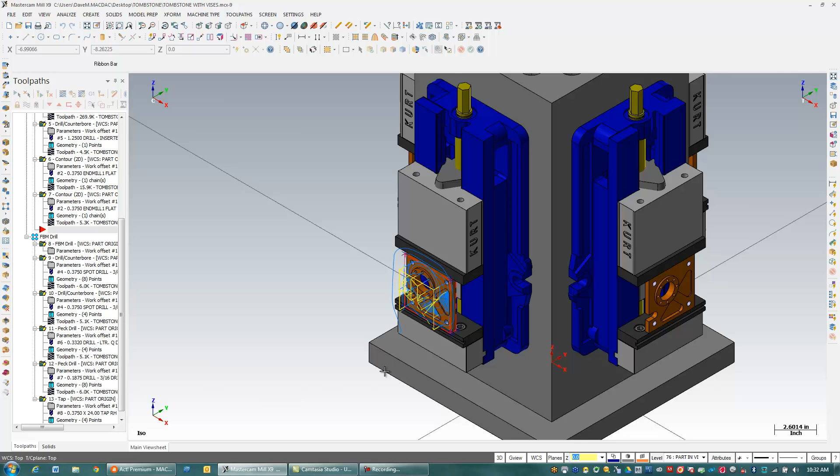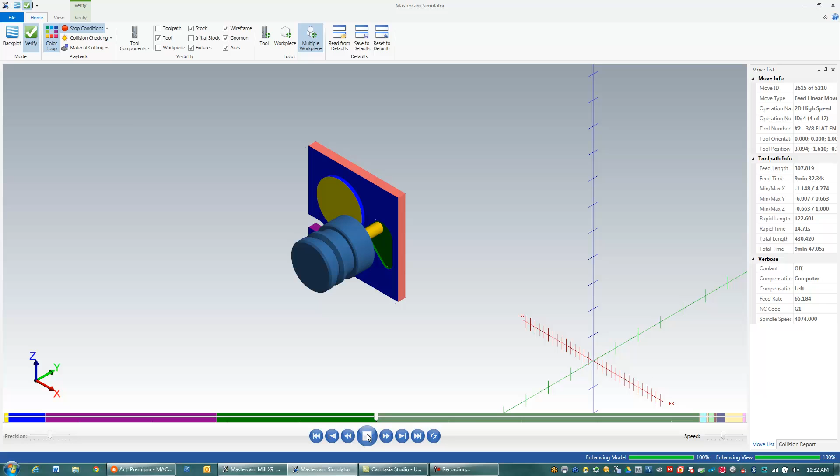I've been programming this part here on a tombstone and things are looking pretty good, and I'm going to go to verify it right now. And when I go to verify it, at least by default, I don't see any fixturing. Now in Mastercam X9 I can bring fixtures into my verify to help me check for collisions or crashes or anything like that. So it's a good idea to do that if you have the fixture already drawn up and that's something you might be worried about.

Now, in order to do that, I need to have my fixture all on one Mastercam level. So right here, this is a part that I brought in from SolidWorks, and it's an assembly. So what happens when you bring an assembly in from SolidWorks, Mastercam puts each solid body on its own level. So what I need to do is to take this and combine them all into one level. So I want to show you some tricks inside the level manager.

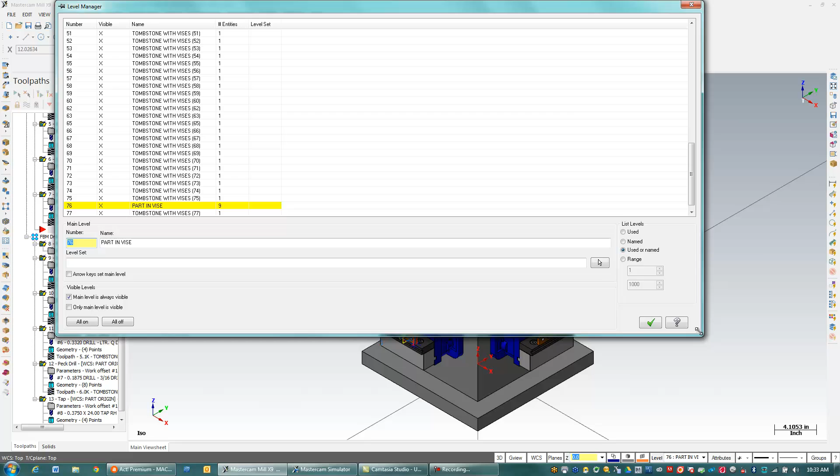So one thing I'm going to do here is I don't know what level the actual parts are on because I just have these all named here, tombstone with vises. So what I'm going to do here is show you this button here. I already did it once for one of these here. I'm going to click here on the select button and pick a solid, and I know that level has a part on it.

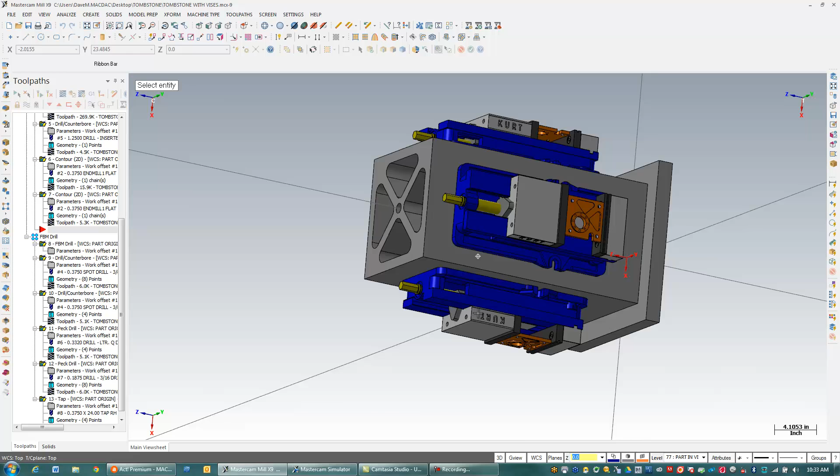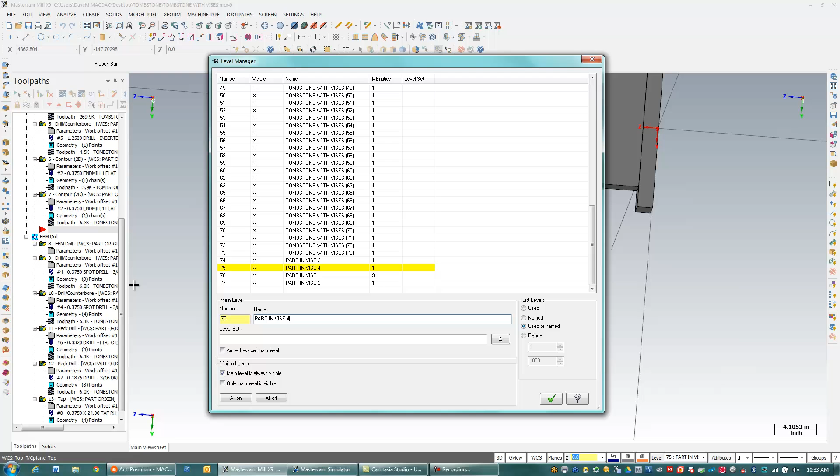And I'll hit the selection button again and I'll rotate around. And I'll hit my select button here again and rotate around. I know I have 4 parts, so I know I only have to do this 4 times. Okay, so that picked that, and the next thing I'm going to do is I'll go back in here.

Now one thing a lot of people don't know, if you have dual monitors, you can leave this level manager open all the time out on your other monitor. I don't have dual monitors right here for the purposes of this video, so I'm just going to open and close it a lot, but I could leave it open.

Now the next thing I want to do is I'm going to put everything that's that tombstone or that fixture on one level. So I'm going to make a level here, call it 100, and I might call it fixtures. And what I want to do is get all those parts that are that fixture on that level that I just made. So pretty simple here. I'm just going to turn off the parts because I want those to be separate. So I have everything now turned on except those parts. And what I'm going to do here is just say select all my entities.

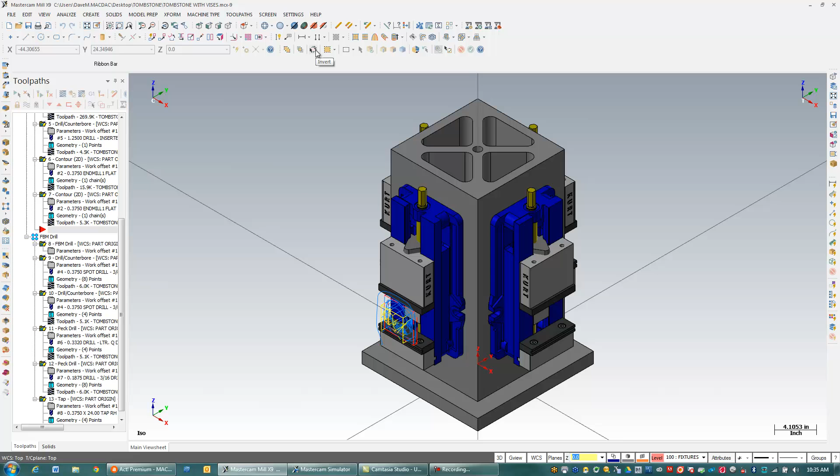So a little trick for you, one of the many ways to select all your entities. If I have nothing selected, I'll hit my invert button. Selects everything on my screen because the inverse of nothing is everything. So I'm going to right click here and I'm going to move that all to my main level, which is 100. I'll hit OK.

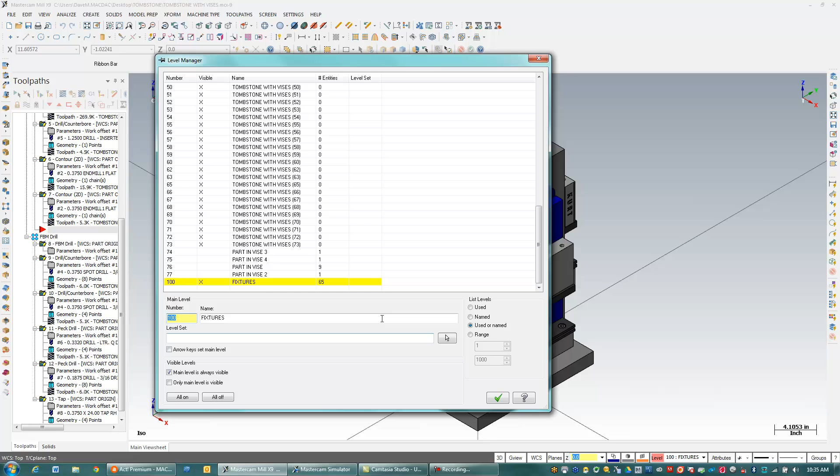And I'll go down here to my level manager, and what you can see here is if I turn that level on and off, it turns the fixture on and off. So what I'm going to do is make this my main level, and now I have all these levels in here with no entities on them.

So here's another neat little trick here. I'm going to right click, hit this button here that says purge all empty levels. And give it a second to update, and I'll just scroll up here. So all the levels that had nothing on them, they had names but they had no geometry, have just been purged out of that list. So I don't have 75 empty levels for me to have to go look at.

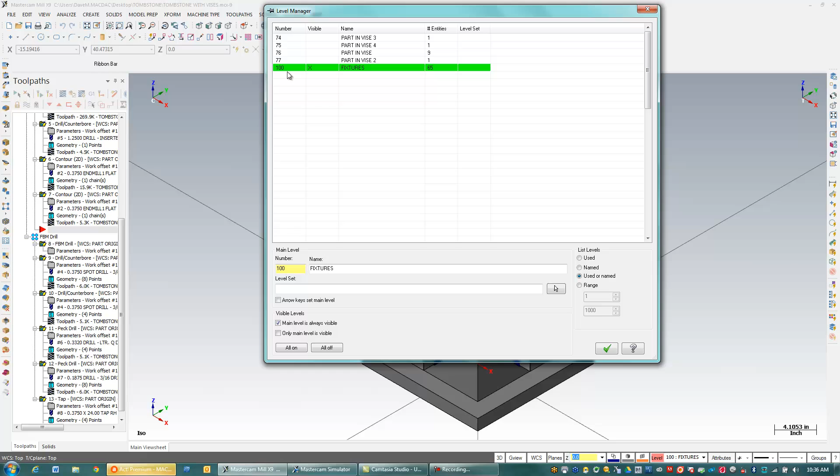So what I'm going to show you in the next video is how I'm going to bring this into my verify in order to verify with the fixture turned on.